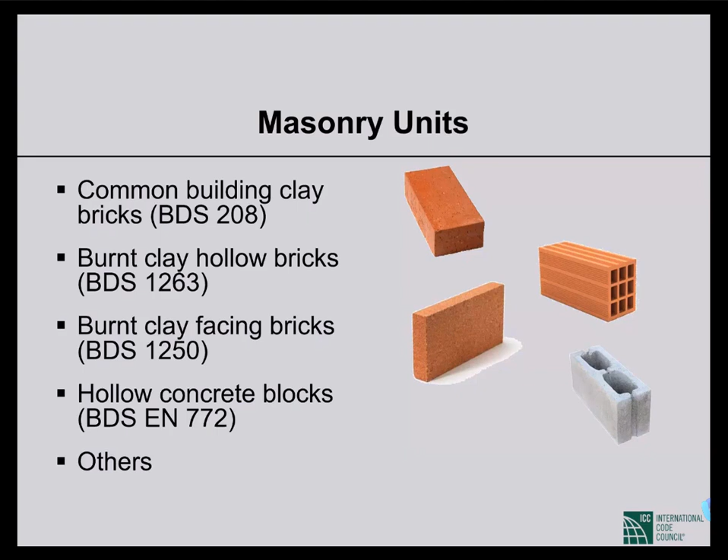Now, that was about masonry unit. And now let's talk about mortar. I think we should keep in mind that mortar is the most important part of masonry, because the strength of the masonry work mostly depends on the strength of the mortar, because mortar is the weakest, or the joints are the weakest part of masonry. I think you all know about this, and that's why we have to be very careful about mortar strength.

Now, depending on the cement to sand ratio, mortars are classified in different grades. So there are 6 standard grades. M1 is the highest grade, or the strongest one, where cement sand ratio is 1:3. And we have M2, M3, M4, M5, M6. M6 is the leanest or weakest grade, where cement sand ratio is 1:8.

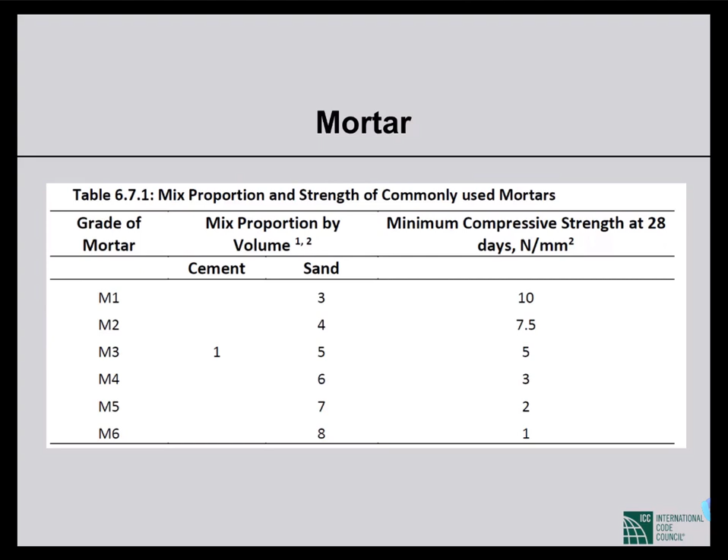Now you can understand the ratio by adding just 2 with the grade. Like for M4, the cement sand ratio will be 4 plus 2, 1:6. And the minimum prescribed compressive strength is mentioned here. We'll see how we can make sure that the compressive strength satisfies these values by doing some tests. We'll talk about that test. So these are the mortar grades.

Now grout to fill the cells of hollow blocks. There can be 2 types of grouts: one is fine grout and another is coarse grout. In fine grout, we don't use any coarse aggregate. In coarse grout, we use fine aggregate and coarse aggregate too.

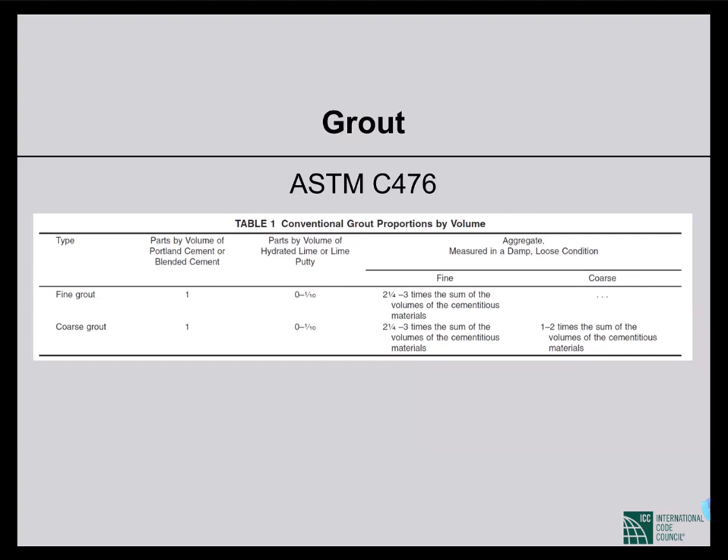So the cement to sand ratio for fine grout is usually 1:3 or like that. And for coarse grout it's 1:5, where 2 parts of the 5 parts is coarse and 3 parts among 5 is fine. So we have to classify this because it's important when we decide about the clear spacing between bar, rod, and masonry unit. For fine grout, we can spare less spacing, and for coarse grout, we have to leave greater spacing. So for that, we need to know what type of grout we are going to use.

Reinforcement: any ordinary reinforcement can be used, like deformed and plain billet steel bars, which is the most common type we have, which is ASTM A615. The ductile type is ASTM A706, which is low alloy steel deformed bars, like the ductility class D steel bars, for example, 500 DWR or 500 DR.

Those are ASTM A706 type rebars. We can use ASTM A706 or normal type ASTM A615. Wires are also available, 6 millimeter or less diameter rebars, available in our country, and epoxy coated rebar can also be used. So all types of rebars can be used as reinforcement.

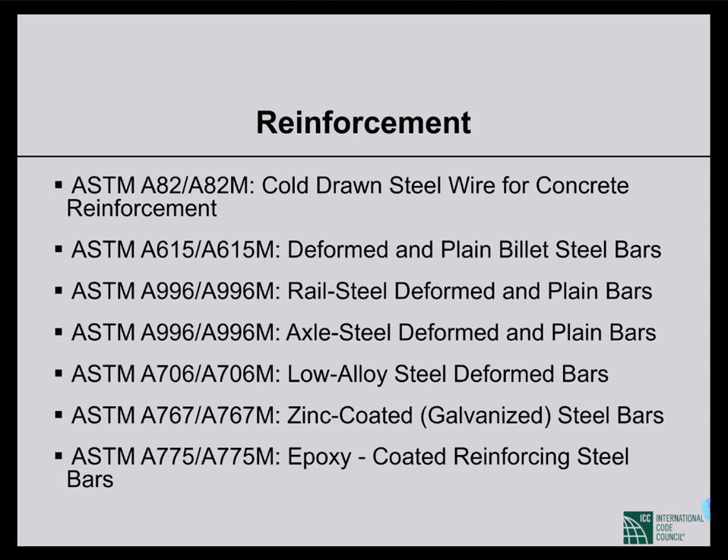Now, metal ties and anchors are used for anchoring the brickwork with foundation or with any other stiff walls like concrete walls, concrete column, steel column, etc. Ties are also used in multi-leaf or multi-wythe cavity walls to connect two wythes or leaves of brickwork of the wall.

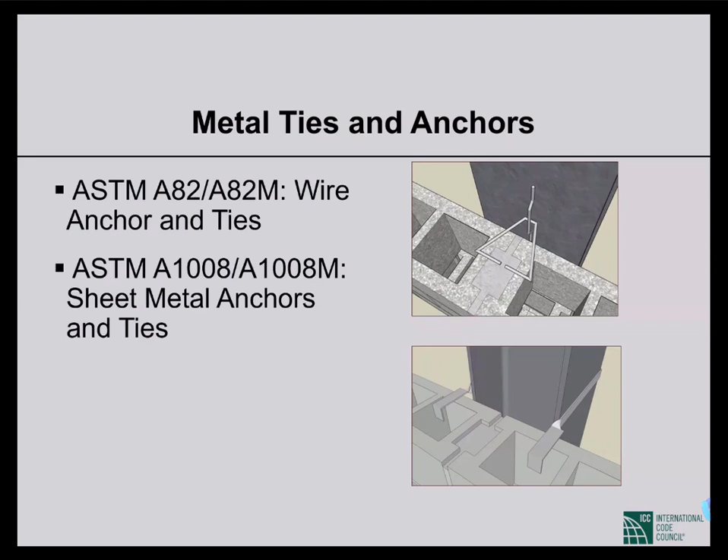Now let's talk about basic design requirements. As I said, the basic design philosophy is working stress design. So for masonry, the code's recommended design method is working stress design method. The stress-strain relationship considered is linear, and second-order effects are not considered. The eccentricity is considered to be very small, and there are provisions which try to make sure there is very small eccentricity of loading on the wall.

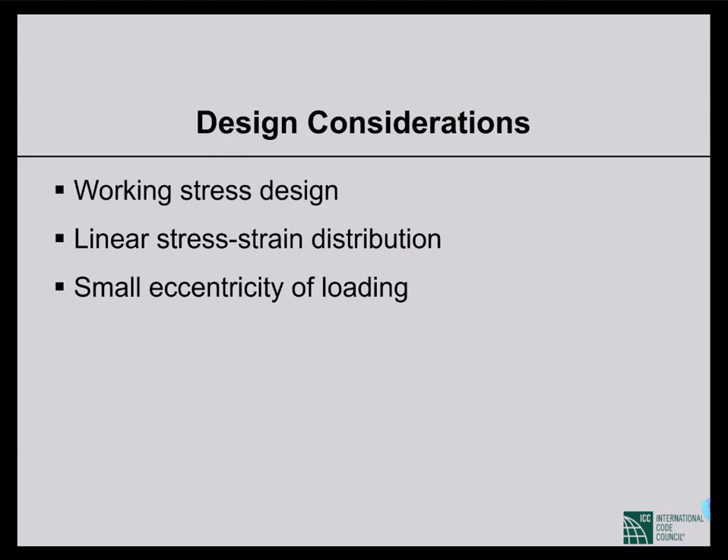Now there are some geometric parameters we have to understand before talking about the design formula. For example, height, effective height. For different support conditions, the effective height of a wall or column will be different. Remember, there can be masonry columns too. Masonry does not have to be only walls, there may be columns. The distinction between wall and column is just the length to thickness or width to thickness.

Width and length is the same thing in this context. Length to thickness ratio - if the width or length of a masonry work is less than 3 times the thickness, then that is a column. If more than that, it's a wall. Depending on the support condition, the effective height will be different. If the wall is continuously supported at the bottom and at the top, then the effective height is the same as the wall height.

But for example, in the figure on the right side, there is a steel beam on top of the column, and there may be a very light roof like a truss, which is not giving continuous support to the wall in the direction out of the plane of the wall. Sorry - it is giving support in the outward direction, out of the plane direction, but not giving any support in the in-plane direction. So in-plane, along the plane of the wall, the effective height is twice the height of the wall. And out of the plane, since there is support, the effective height equals the height of the wall.

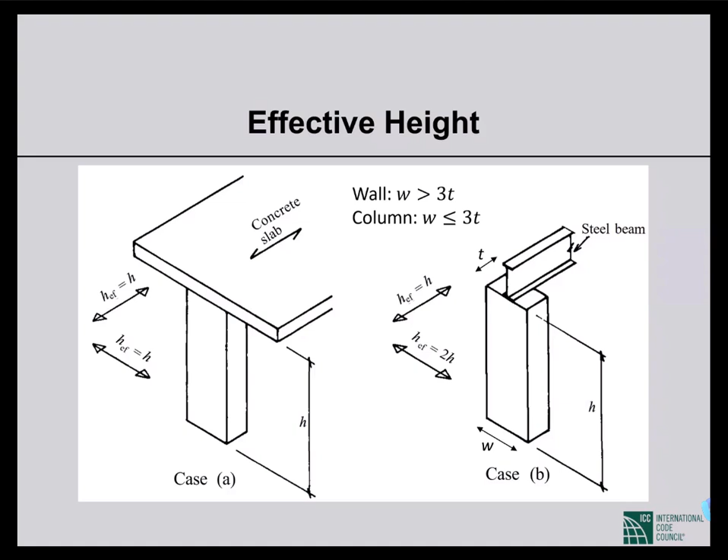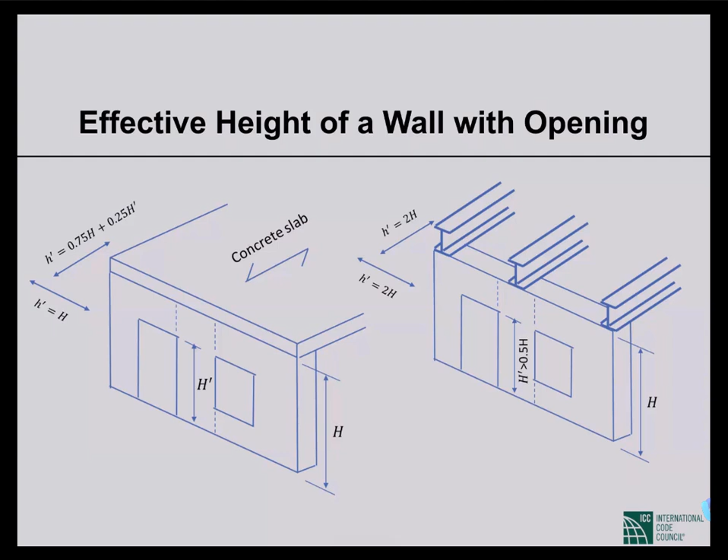That was effective height. Now we also need the definition of effective length. There may be 5 different conditions. On the top left, you can see that the wall is continuous and is supported by cross walls.

And openings are away from the cross wall by a length of 1/8 of the height of the wall. In that case, the effective length will be the shortest one, which will be 80% of the spacing, center to center, of the cross walls. So that will be the effective length, 80% of the length, this is the shortest one. Remember, the longer the length, the greater the slenderness ratio, so that's more conservative.

In the second case, on top right, we can have a cross wall on one end and continuous on the other side. In that case, the effective length will be 90% of the spacing between the cross walls.

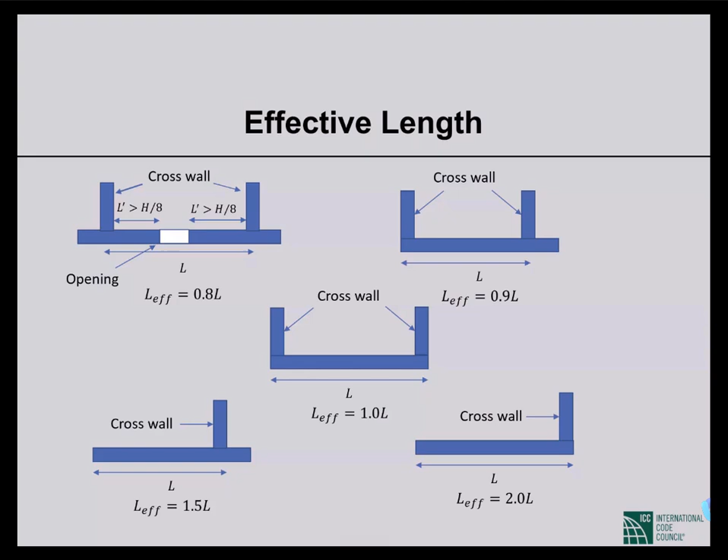So we have talked about effective height and effective length. Now we'll talk about effective thickness. Effective thickness is basically the nominal thickness of the wall.

But in case of a cavity wall, you can see the second case on top right. This is just a cavity wall where we have two leaves of wall, or two limbs. In different standards, it is termed differently. Even in our code, sometimes it's called wythe, sometimes limb, and in other standards it's called leaf. So we have two limbs or wythes of brickwork and a cavity in between. This is called a cavity wall.

So in case of a cavity wall, the effective thickness is the summation of the thickness of the two limbs, T1 plus T2. In many cases, we can have piers or pilasters.

A pilaster or pier is a kind of stiffener where, in certain locations, we thicken the wall to give lateral support. When this type of pilaster or pier is used, the pier thickness is termed TP, which is the summation of the thickened part. The total thickness of the thickened part is called TP, pier thickness.

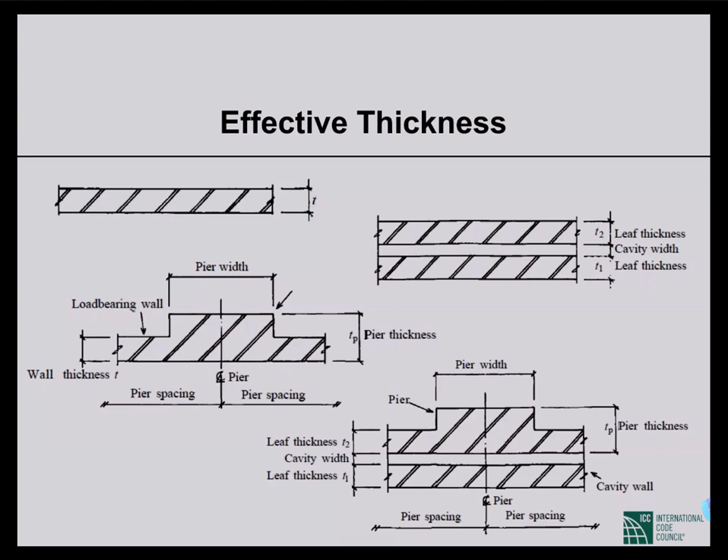Effective thickness is the thickness of the wall multiplied by a factor K. The K depends on two things: one is the LP by WP ratio, where LP is the center to center distance of pilaster spacing and WP is the pilaster width. The other is TP by TW, where TP is the pier or pilaster thickened width and TW is the nominal thickness of the wall. Depending on these two ratios, we multiply the nominal thickness of the wall by the factor K, and that is the effective thickness.

So now we have the definition of slenderness ratio. For walls, the slenderness ratio is defined as the lesser of the effective height to effective thickness ratio, or the effective length to effective thickness ratio. We have discussed effective height, effective length, and effective thickness, so now we can calculate these ratios, and the lesser of the two will be the slenderness ratio of the wall. And there is a provision that...

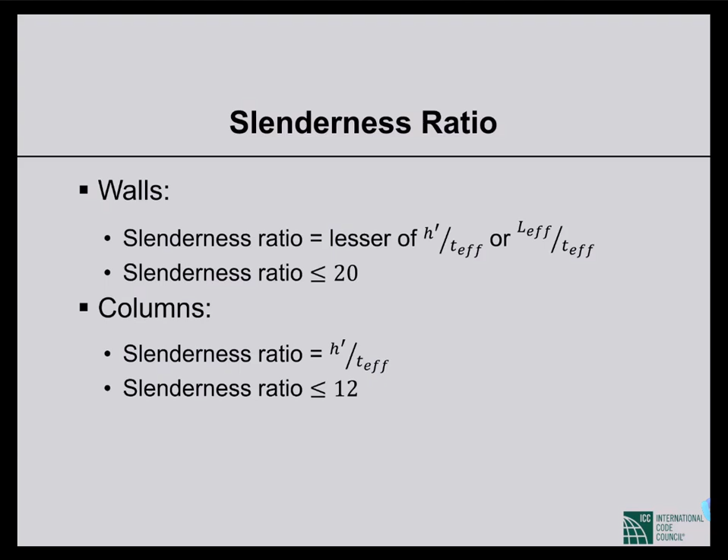We need another piece of information related to loads. Loads will follow Part 6 Chapter 2 - dead load, live load, wind load, earthquake load - as defined there. These were discussed previously in other sessions, so we'll just follow them, and we'll use the load combinations of working stress design, or allowable strength design load combinations.

For calculation of stresses, we need the loaded length. For example, if there are beams on a wall and the load is coming to the wall through the beams, what should be considered as the loaded length for stress calculation?

The loaded length will be the center to center spacing of the beams, but this cannot be more than the width of loading shown in the picture - that is the flange width of the beam or the bearing width of the beam, plus 4 times the thickness of the wall. So it's limited to this value. We can divide the load by the loaded length and the thickness of the wall to get the stress in a simple way.

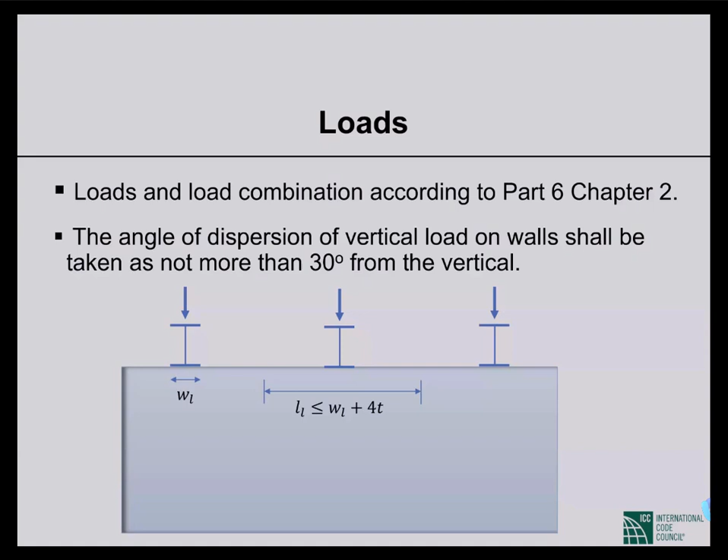Minimum design dimensions - this is very important. For load-bearing walls, the effective thickness of the wall must be greater than 250 millimeters, that is 10 inches. 5-inch walls cannot be load-bearing walls. If we want to design load-bearing walls, the minimum thickness has to be 250 millimeters or 10 inches.

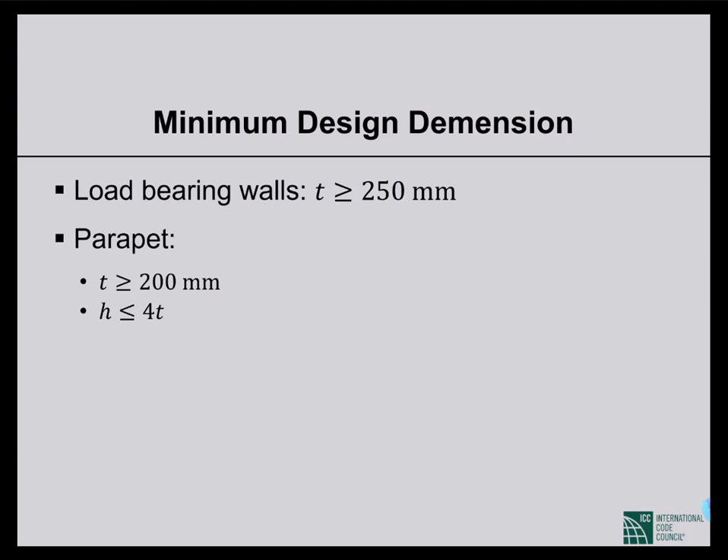For parapets, the minimum thickness requirement is less, that is 200 millimeters. And for parapets, the height must be less than 4 times the thickness of the parapet. In other words, if we want a higher parapet, we have to increase the thickness. So those were the basic design requirements.

Now, what are the formulas for allowable stresses? Remember, we follow working stress design, so we'll define allowable stresses. But first we need to know the strength of the brick unit. Like the cylinder test, by which we understand the strength of concrete, FC prime - here we have FM prime, the 28 days strength of masonry unit, just like the cylinder test. This is mentioned in ASTM E447, the prism test.

We can prepare a masonry unit sample by placing 5 bricks with bed joints, and this will make a prism. In some cases we can make it using 3 bricks or similar. The slenderness ratio is corrected in calculation as given in ASTM E447. Usually 5 bricks are placed with bed joints. Using a UTM or any compression testing machine, we apply compression and determine the strength, which is FM prime, the 28 days strength of masonry unit.

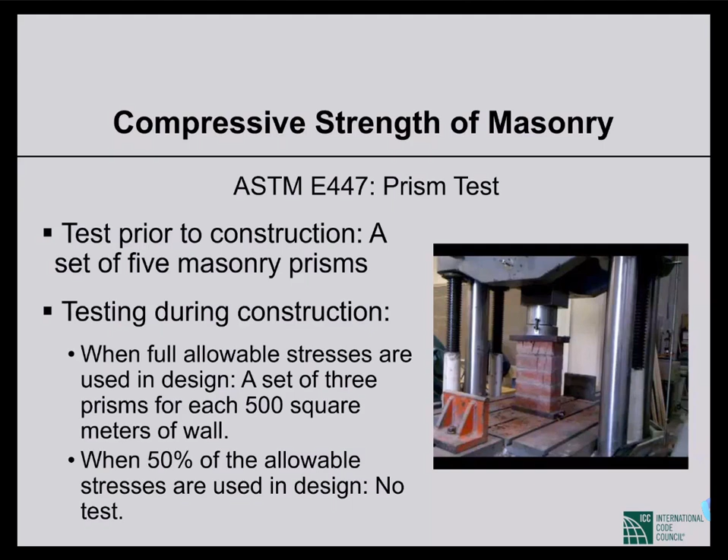So now what are the allowable stresses? The allowable stresses for axial compression, flexural compression, shear, etc., we'll see. But another important clause in the code is that if we don't take help of special inspection, we have to divide all these allowable stresses by 2 - that is, we can take only 50% of these as allowable. So if we have proper inspection at site, these formulas will give us the allowable stresses.

Now, for axial compressive stress for unreinforced masonry, all these cases depend very much on the slenderness ratio - this H prime by T ratio is the slenderness ratio, effective height by effective thickness. Normally FM prime is the 28 day masonry strength, and for URM we divide this by a factor of 5, so the factor of safety is like 5.

We are subtracting this value depending on the slenderness ratio, and it depends cubically. So if our slenderness ratio is high, then the allowable stress is reduced cubically. So that is very important.

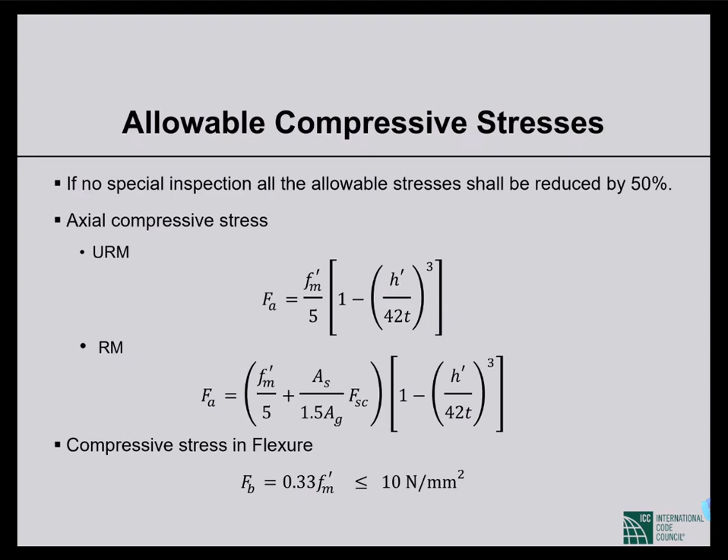That is the specified strength of M1 grade mortar, the strongest grade of mortar, with specified strength of 10 megapascal. Since the masonry joint is the most critical part of masonry construction, the strength is governed by the joint strength, and this cannot go beyond the strongest masonry grade strength. That's why there is this limit of 10 megapascal.

Now, allowable tensile stress. We talked about compressive stress; now let's talk about tensile stress. Tensile stress tries to pull the masonry units apart, the bricks apart. The bricks can be taken apart from the bed joint or from the head joint. Depending on whether the tension is normal to bed joint or normal to head joint, we have different allowable stresses, and we have different allowable stresses for solid units and for hollow units.

For M3 and M4 type mortar - remember there were 6 grades, M1 to M6. For M1 and M2, the cement to sand ratio is 1:3 and 1:4, and for those types these are the allowable stresses. But for M3 and M4, with cement to sand ratio 1:5 or 1:6, we have to reduce these values by 25%. This is important. Actually, below M4, grades M5 and M6 are seldom used for structural load-bearing masonry construction.

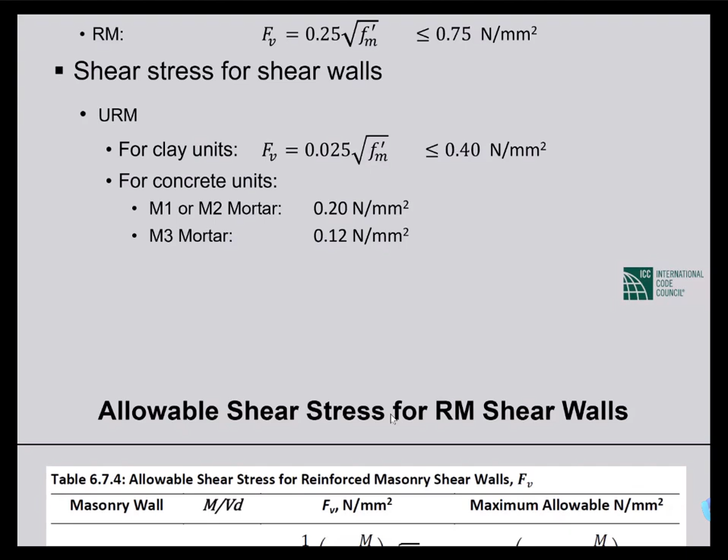For reinforced masonry, it will depend on the moment - in-plane moment divided by shear force, divided by effective depth. Effective depth is calculated from one end to the reinforcement at the other end, the same way we calculate effective depth for reinforced concrete.

So M by VD. Now, if M by VD is less, we have a different formula. If the contribution of the moment is large, then we have some fixed values depending on Fm prime as allowable shear stresses.

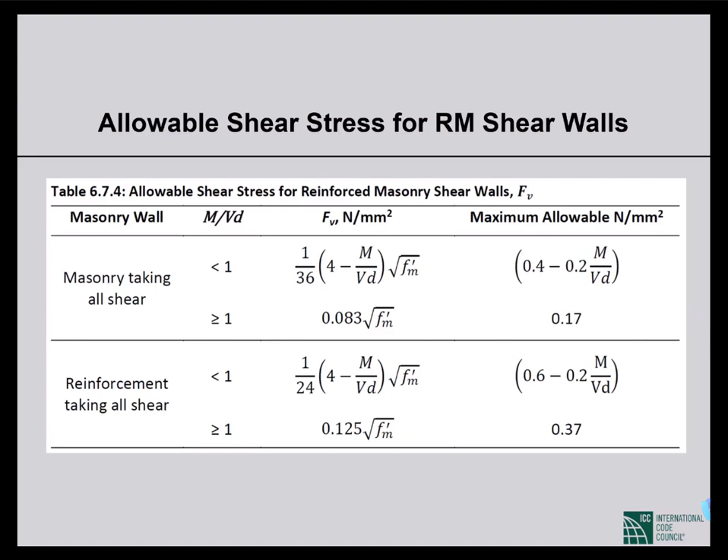For reinforced masonry, we can design in two ways. For tensile stresses, we always depend on reinforcement. But for shear stress, we can depend on masonry or we can depend on reinforcement. So depending on our assumption, the allowable stresses are different.

Now, those were the allowable stresses in masonry. Now, for allowable stresses in reinforcement - for tensile stress, compressive stress, and bond stress - these are the values. You see, we are quite conservative. This is working stress design. So naturally, the allowable stress is 50% of Fy for tensile stress, but the highest limit, which is quite conservative, is 165 megapascal.

So 50% of 60 grade steel is how much? 210 megapascal, if we consider 420 megapascal as 60 grade. So in that case, 210 should be the limit for 60 grade steel. But here we are quite conservative - we don't allow the allowable tensile stress to be more than 165 megapascal, which is like 40% of Fy for 60 grade steel.

For reinforced masonry construction, we are quite conservative because we cannot depend on the bonding between the reinforcement and grout as reliably as we can depend on the bonding between reinforcement and concrete. The bonding will not be as reliable. That's why we're quite conservative even for allowable stresses in reinforcement. The other values you can see.

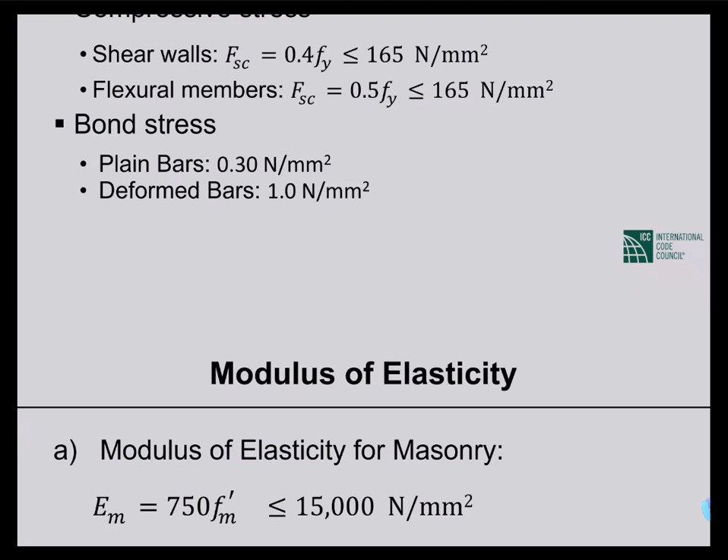Now, for modeling purposes, modulus of elasticity is important. From the prism test, we can find Fm prime, and depending on Fm prime, we can calculate the modulus of elasticity, just like for concrete.

Modulus of elasticity depends on Fc prime for concrete, and here for masonry it depends on Fm prime, but this is directly proportional to Fm prime. In case of concrete, it is proportional to the root over Fc prime. Here it is directly proportional to Fm prime.

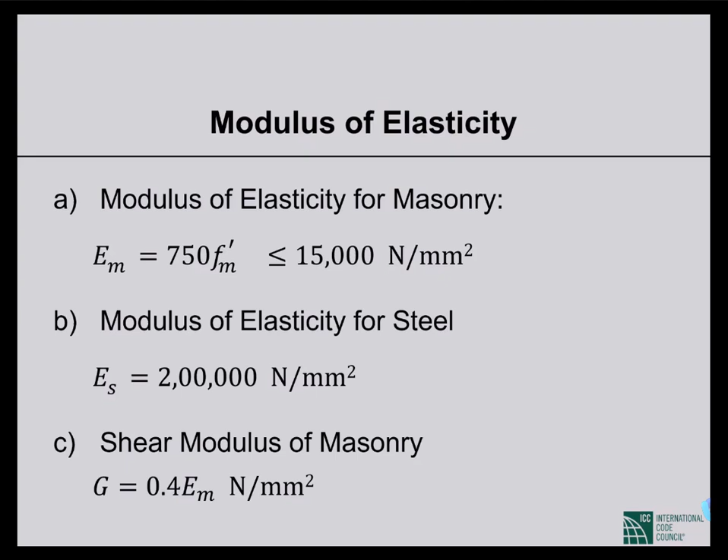So we have all the basic geometric parameters like effective height, effective length, effective thickness. Based on these geometric parameters, we can define slenderness ratio, and based on slenderness ratio, we can define allowable stresses. Then for design of unreinforced or reinforced masonry, we have to check with the applied stresses.

The actually applied stresses use quite common formulas. For unreinforced masonry, we consider it as a homogeneous material, and based on that assumption, we just calculate the basic stresses. So for axial stresses, it's just force divided by area.

For flexure, it's MC over I, and for shear, force divided by effective area. You have to remember the areas as effective areas, where we'll use effective length and effective thickness to calculate effective area. So that's the only difference. This is very easy.

Then for reinforced masonry, things are the same as what we do for reinforced concrete. Here the assumptions are: masonry does not carry any tensile stress, so all tensile stresses will be carried by reinforcement. And the second assumption is reinforcement is completely bonded with the masonry through grout.

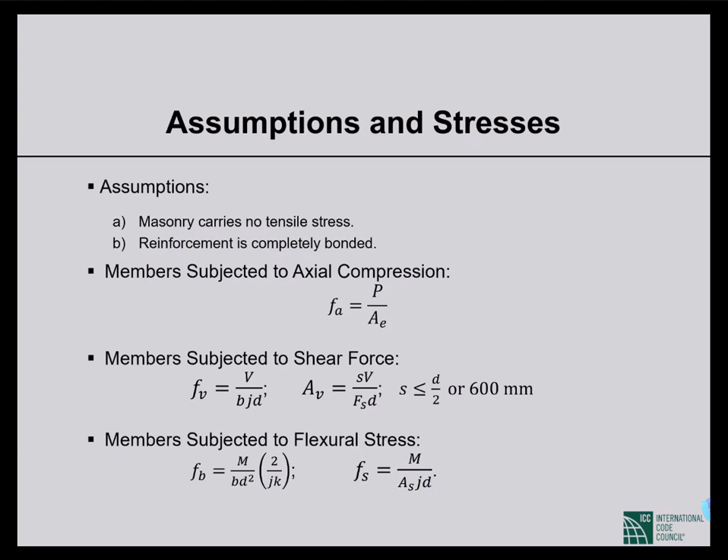Some requirements for reinforcement: the first is maximum reinforcement size. We can go for quite a large diameter rebar, 35 millimeters is the maximum reinforcement size we can use. The maximum amount of reinforcement in a cell is 6% of the cell area without splice. If we use splice for lapping purposes, we can double this percentage to 12%. Now, spacing of longitudinal reinforcement is similar to reinforced concrete: spacing between two bars will be 25 millimeters or bar diameter.

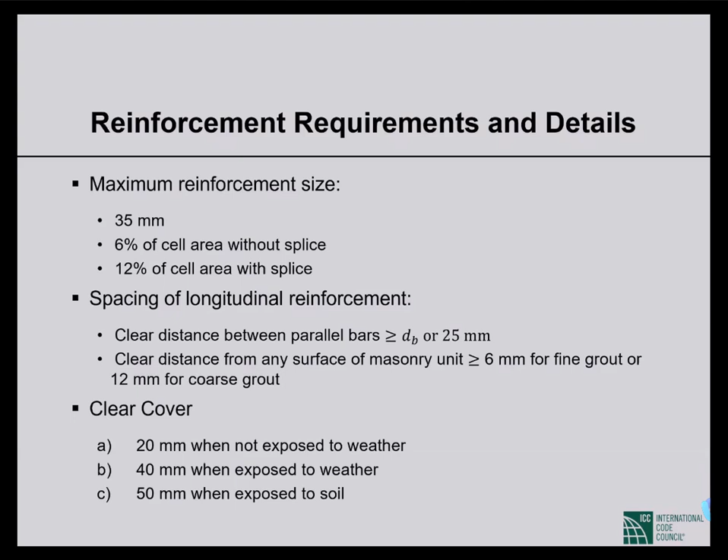Now the stability requirements, so that is very important. This is very important. In case of masonry, since in our analysis we are not considering second order effects, we have to make sure that second order effects do not come, or even if they do come, they are not significant.

So the basic requirement is that the height to width ratio of a masonry building cannot exceed 2. Height to width ratio is specified, and we have to stiffen the walls by cross walls or piers or pilasters. We have to stiffen the walls at regular spacing.

Now, that was all about working stress design of unreinforced masonry wall or reinforced masonry wall. But there is also a strength design method, but that is particularly for slender walls and shear walls.

Slender walls are defined when the axial load is much low compared to its strength. So if the load from wall and load from floor — PW is the load from the wall, so self weight, and PF is the load from the floor, that is live load plus self weight, dead loads of the floor and beams etc. — PW plus PF divided by the gross cross section is less than 4% of FM prime, then we can go for slender wall design, and FM prime cannot be more than 40 megapascal.

Now, in this case, we can go for slender wall. Again, even if we go for slender wall, the wall thickness cannot be less than 150 millimeters. So minimum wall thickness for non-slender type of construction is 250 millimeters, but minimum wall thickness for slender type of construction is 150 millimeters.

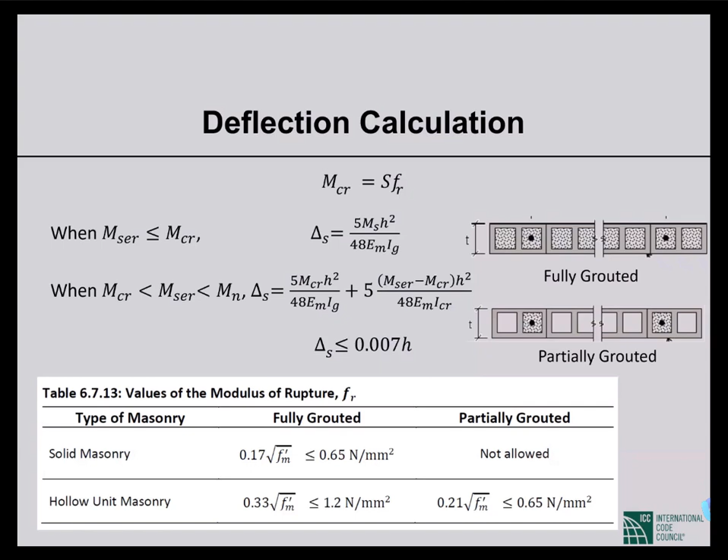So using this formula, we can calculate delta, and with that delta, we have to multiply the axial force. Then we'll get the applied moment, ultimate moment on the section. So we are considering second order effect of slender walls in this indirect way.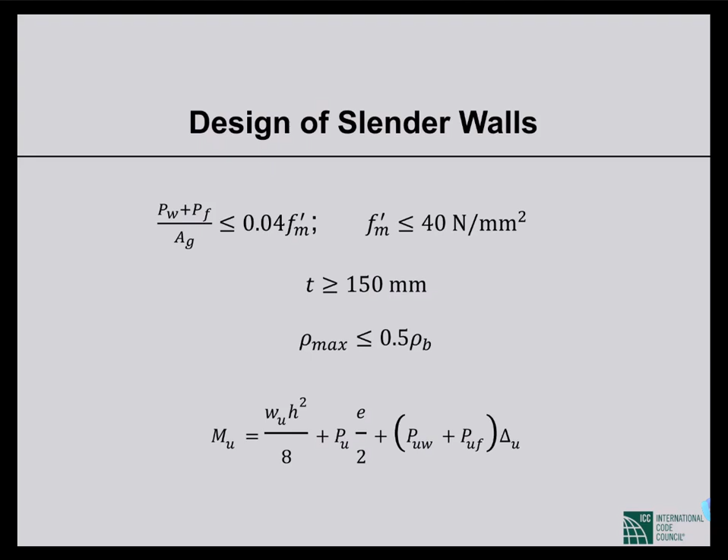And then shear walls. For design of shear walls, the phi values, strength reduction factors. Since we are adopting the strength design method, the strength reduction factors are specified for axial load or axial load with flexure. The phi value is quite low, 0.65, but we can take higher values if the axial load is less. For Fy less than 410 megapascal, that is not for 60 grade, 60 grade or higher grade steel. For higher grade steel, we have to go for phi equals 0.65.

But for lower grade steel, and if the arrangement of reinforcement is symmetrical, then we can increase the value of phi if the axial load is less, actually. So if the axial load is less than 25% of axial load, if we consider balanced reinforcement, or 10% of the total capacity of Fm prime into effective area, if it is less than 10%, then we can increase the value of phi. For shear, it is even less, 0.6.

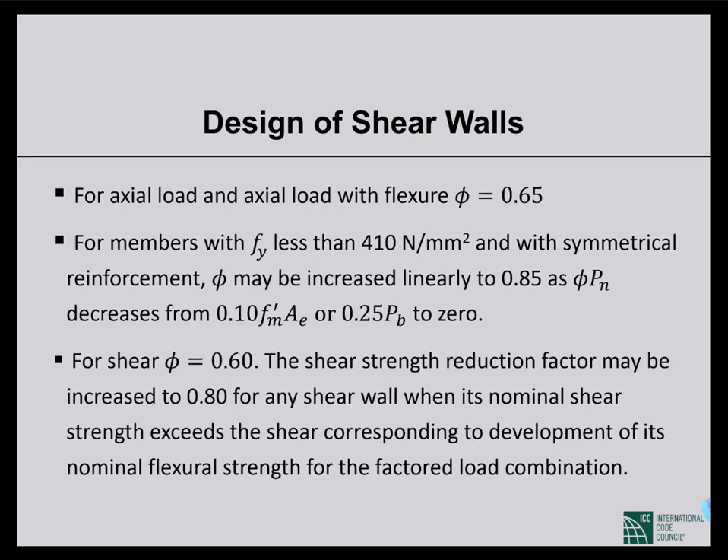So now the nominal strength Fm prime, we get this value from Prism test, but Fm prime cannot be less than 7 megapascal or cannot be more than 20 megapascal. Axial strength is the same formula as we use for RC columns, similar formula, so that is for axial strength.

Shear capacity will depend again upon M by VD ratio, and the shear capacity is mentioned here in megapascal. So shear capacity is the Vn. We have to multiply Vn with phi, and these values are given as Vn divided by A root over Fm prime. So basically Vn is equal to 72 into A into root over Fm prime, and we have to multiply this with phi, then we'll get the shear strength. So for shear stress, the in-plane stresses, the capacity for in-plane stresses, we can calculate them with these formula.

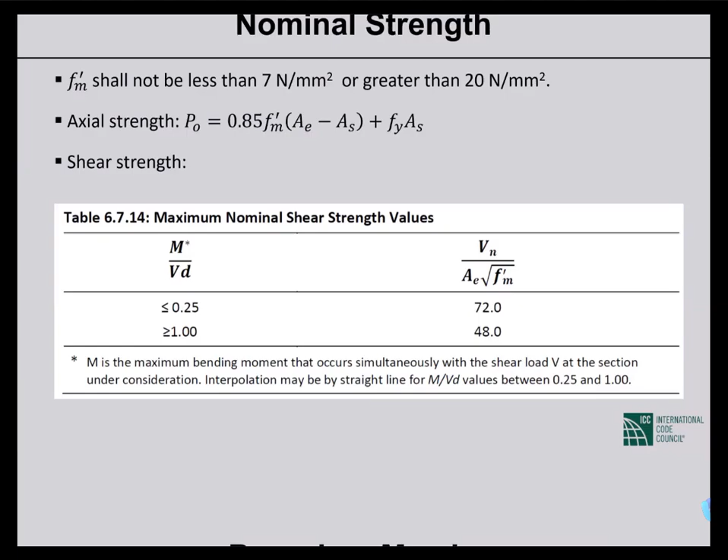In case of shear walls, we may have to use boundary members, similar to reinforced concrete shear walls. In boundary members, we have to use ties with vertical reinforcement. Now, when we have to use boundary members, if the failure mode is flexure, and the maximum extreme fiber stress, that is flexural fiber stress, is 0.2 Fm prime, then we have to use boundary members to take care of the extreme stresses on two ends of the shear wall.

When the failure mode is flexure, boundary members shall be provided to confine all vertical reinforcement whose corresponding masonry compressive stress exceeds 0.4 FM prime. The minimum length of the boundary member shall be 3 times the thickness of the wall, meaning the dimension along the length of the wall will be 3 times the wall thickness. And the capacity of the boundary element has to be 0.4 FM prime.

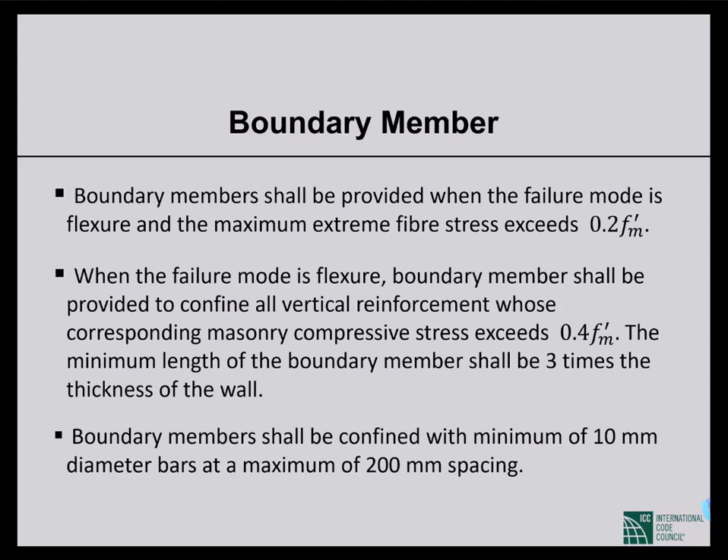So those were some important points regarding design of shear walls and design of slender walls using strength design method. We have talked about working strength design method for unreinforced masonry construction and reinforced masonry construction, and we have talked about the strength design method for slender walls and shear walls. There are some more details in the code, so please look up the code for those details. We have just briefly mentioned some important points regarding capacity and stresses that will come out of those structures.

Now, a very important part is earthquake resistant design. For different seismic zones, we have different provisions for masonry construction, and those are given in detail in this section of the code. This section is for masonry construction in seismic zones 2, 3, and 4. For seismic zone 1, you don't have to follow these specific earthquake resistant design provisions.

Number one, FM prime cannot be less than 12 megapascal. Remember, for shear wall, we mentioned that FM prime cannot be less than 7 megapascal, but for earthquake resistant design, FM prime cannot be less than 12 megapascal. This is somewhat similar to earthquake resistant design of concrete, where the concrete strength cannot be less than 3000 psi, or 21 megapascal. So for masonry, it's 12 megapascal.

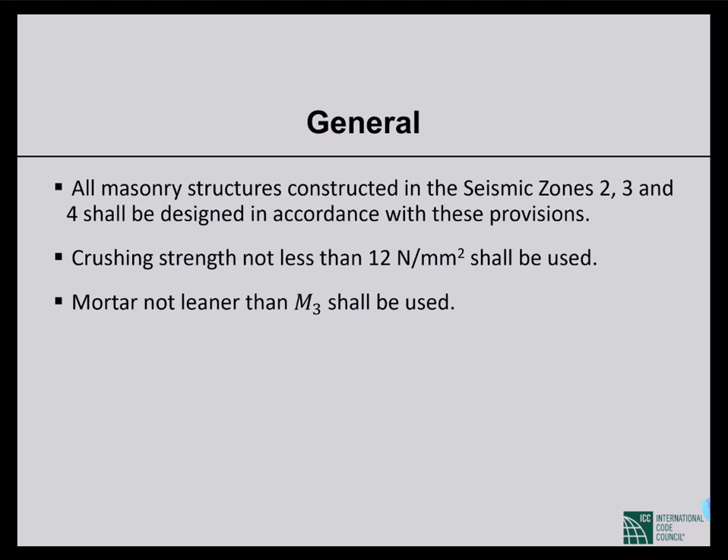And mortar must be of M3 grade or higher grade - M1, M2, M3. That is, cement sand ratio should be 1:3, 1:4, or 1:5. No leaner mortar can be used - M4, M5, M6 cannot be used for earthquake resistant design. Those were for material.

Now provisions for seismic zones 2 and 3. We have different sets of provisions for seismic zones 2 and 3, and for seismic zone 4. For seismic zones 2 and 3, vertical reinforcement of at least 12 millimeter diameter shall be provided continuously from support to support at each corner, at each side of each opening, at the ends of walls, and at a maximum spacing of 1.2 meters horizontally throughout the wall. So a lot of details - number one, the minimum bar diameter for vertical reinforcement will be 12 millimeters.

Number two, where to provide vertical reinforcement - this is actually the earthquake resistant design for unreinforced masonry. Even for unreinforced masonry, we have to provide at least these reinforcements. For reinforced masonry, we normally use reinforcement and calculate what reinforcement will be needed, but these provisions are for unreinforced masonry, and we have to provide at least this reinforcement at specific locations.

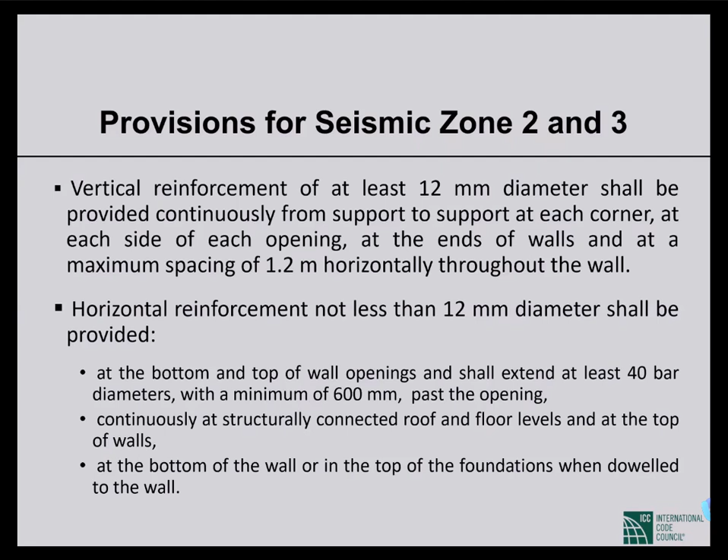For seismic zone 4, all those requirements, the provisions mentioned for seismic zones 2 and 3, will be applicable, plus additional requirements. The sum of the areas of horizontal and vertical reinforcement shall be at least 0.002 times the gross cross-sectional area of the wall.

So 0.2% of AG, this amount of reinforcement has to be provided both horizontally and vertically. Say 50% of this has to be provided as vertical reinforcement, and 50% has to be provided as horizontal reinforcement.

So for the cross section, you have to take the cross section of a wall. For horizontal reinforcement, you take a vertical cross section. For vertical reinforcement, you take a horizontal cross section.

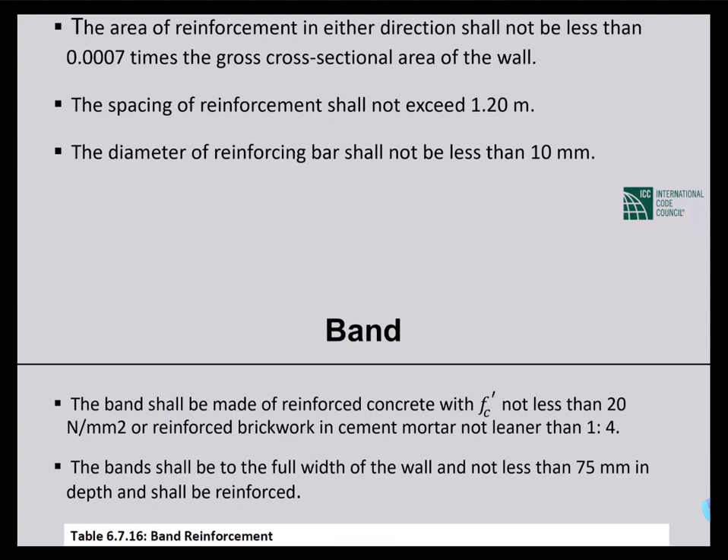We are supposed to provide vertical reinforcement at the corners and at the sides of the openings. So we calculate all those reinforcements, and if that is less, we calculate the vertical reinforcement provided as per the provisions already mentioned, along with horizontal reinforcement. If the summation of those reinforcements is less than 0.002 times the gross cross-sectional area of the wall, we have to provide more reinforcement.

The area of reinforcement in either direction shall not be less than 0.0007 times the gross cross-sectional area of the wall, so there is a minimum in each direction. The spacing of reinforcement shall not exceed 1.2 meters, both for horizontal and vertical, and the diameter of reinforcing bar shall not be less than 10 millimeters.

So even in case of ties for boundary elements, the diameter of rebar will be 10 millimeters or more. But for horizontal and vertical reinforcement, it has to be 12 millimeters or more.

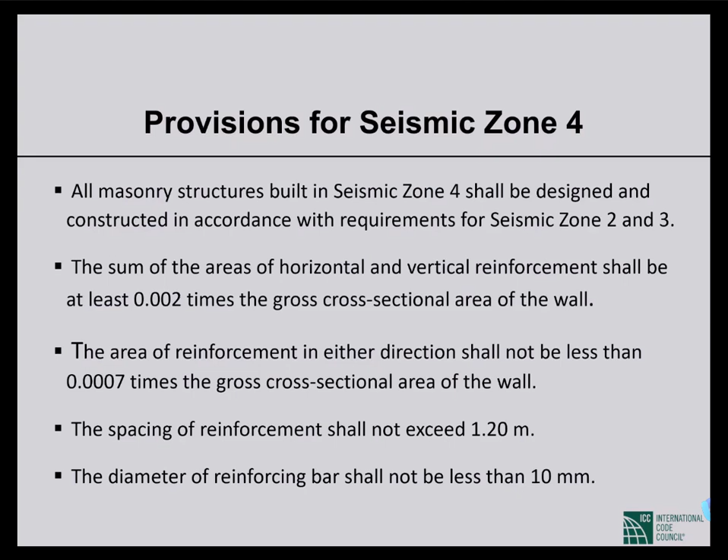And band - we have to place some concrete sections at certain locations. These are called bands, some reinforced concrete sections. The band shall be made of reinforced concrete with FC prime not less than 20 megapascal, or reinforced brickwork in cement mortar not leaner than 1:4, that is M2. The bands shall be to the full width of the wall and not less than 75 millimeters in depth, at least 3 inches, and shall be reinforced.

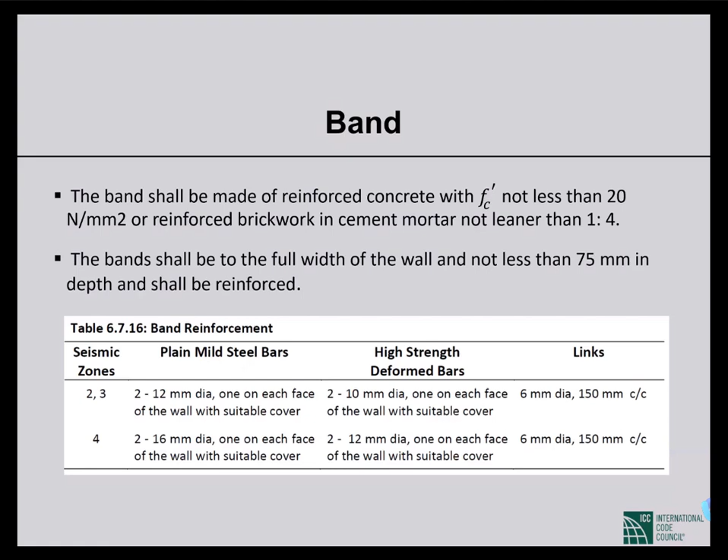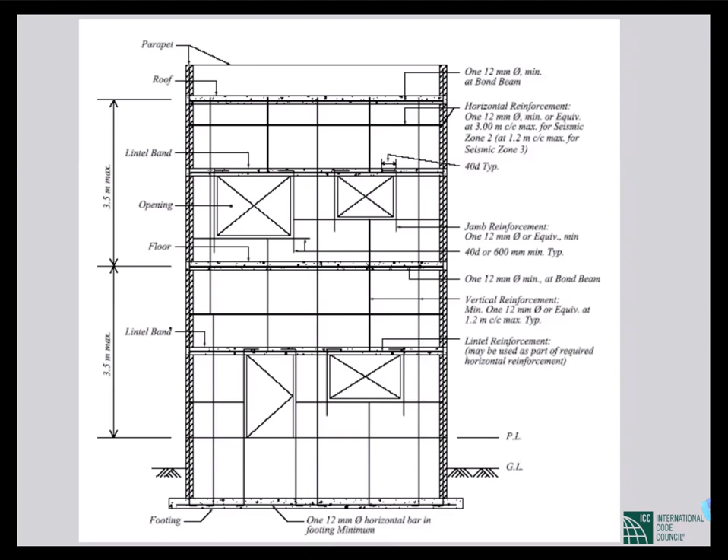So that was earthquake resistant design of masonry. Remember again, for seismic zones 2, 3, and 4, we cannot make a purely unreinforced masonry - that is the traditional practice in our country, where we don't use any reinforcement in masonry. But even if we want to build an unreinforced masonry building, at least these reinforcements have to be provided. If we do not go for reinforced masonry design, even then we have to use those reinforcements.

So now you understand that traditional unreinforced masonry is not allowed in seismic zones 2, 3, and 4. You have to remember that. Now, since traditional unreinforced masonry is not allowed, for those buildings already built, how do we strengthen them?

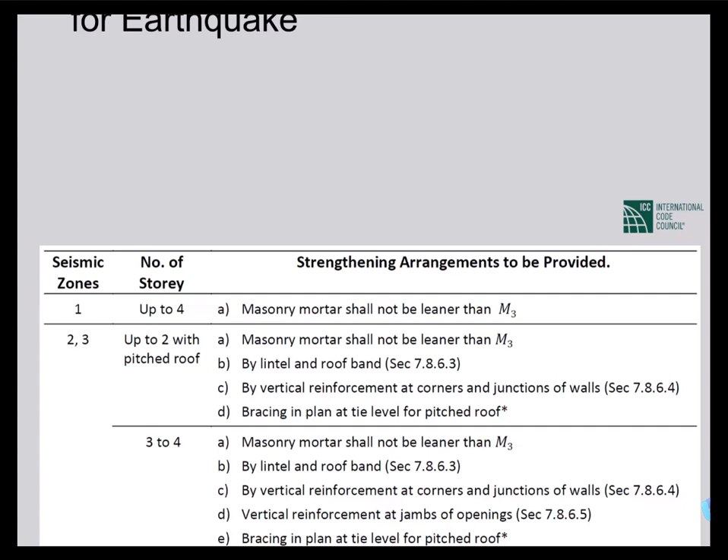There is a table in the BNBC 2020 with some guidelines on what has to be used, what types of materials we can use for strengthening. It will depend on the seismic zone - if the building is in seismic zone 1, 2, 3, or 4 - and depending on the height of the building, the strengthening arrangements are listed in this table.

For example, if we talk about seismic zones 2 and 3, up to 2-storied height buildings, we can go for masonry mortar not leaner than M3. This is true for all the cases. We have to use lintel and roof bands - here you see where we have to use bands, it is mentioned.

For seismic zone 1, we don't have to use any band, that is reinforced concrete sections. But for strengthening purposes, for seismic zones 2, 3, and 4, we have to use lintel and roof bands. Vertical reinforcement has to be used at every corner and junction of walls, and bracing in plan at tie level for pitched roofs - for the pitched roof at the tie level, we have to use bracing.

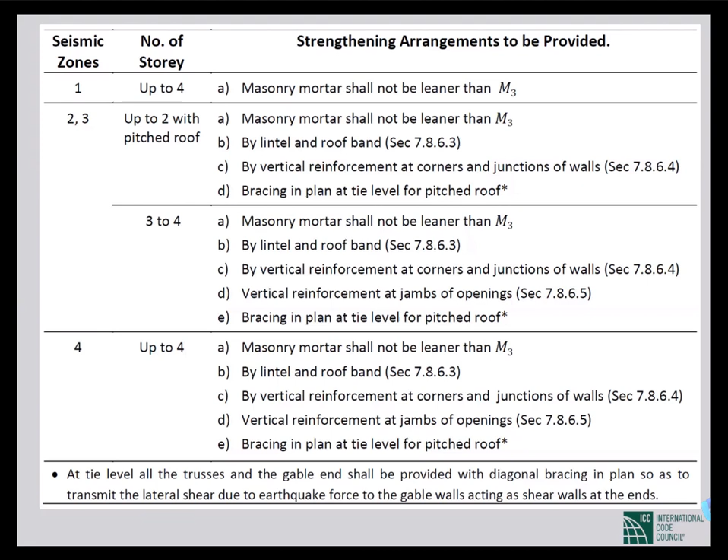Similarly, for higher buildings, we have additional requirements. Vertical reinforcement at jambs of openings have to be provided, etc. The relevant sections are mentioned in this table, so for strengthening purposes of unreinforced masonry construction in different zones and heights, we can consult this table and design accordingly.

So those were different specific guidelines for unreinforced masonry, reinforced masonry, slender walls, shear walls, and earthquake resistant design. Then we talked a little bit about strengthening of masonry construction. Now I'll introduce a new type of masonry construction. It is called confined masonry.

This is actually the new addition to BNBC 2020. All other provisions were actually there in BNBC 2006, except that the mention of zones were different in the previous code, and in this version we have 4 zones. Apart from that, all other provisions are identical to the previous version. This confined masonry was not there in BNBC 2006. In BNBC 2020, this concept is introduced.

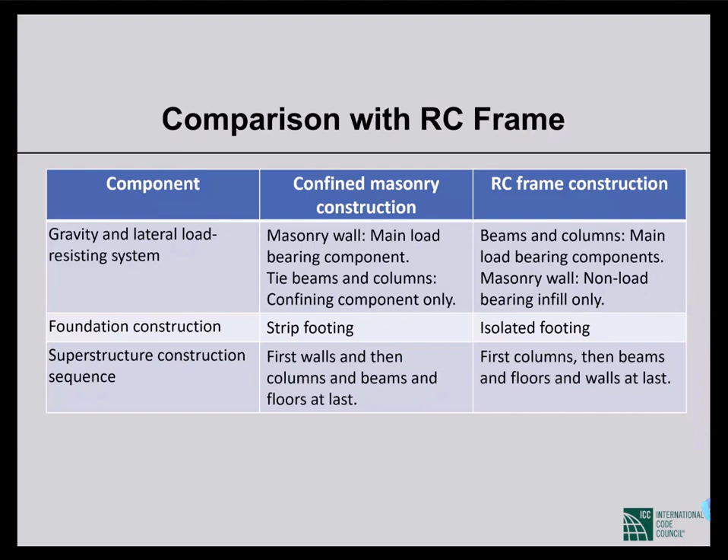Now there are some architectural guidelines. First, building length to width ratio should not exceed 4. So not only width to height ratio, but here width to length ratio is important - it should not exceed 4. The walls should be continuous up, so that there shouldn't be any offsets.

The walls should be on top of each other like load-bearing walls. We cannot have walls in any place on the slab like we do for RC frame structures, where we can place walls in between any place on the slab. We cannot do that in this type of construction. The walls have to be on top of each other, continuously up.

Openings should be placed in the same position. This is also very restrictive from an architectural point of view, that the openings of the first floor should be exactly at the same position as the openings of the ground floor, or the second and third floor. In all floors, the openings should be at the same position.

At least two fully confined walls should be present in each direction. In each direction there has to be redundancy, so that we cannot depend on only one confined wall. There has to be at least two fully confined walls in each direction.

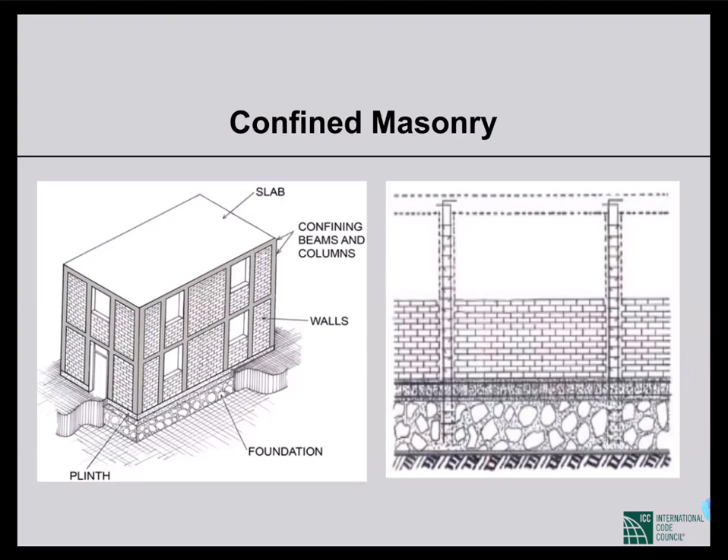And about the horizontal element at the floor level, at every floor level we have to have a confining beam or tie beam, at a maximum spacing of 4 meters. So these are the rules. We can build something like unreinforced masonry, but we have to have these confining elements, and that will make it confined masonry.

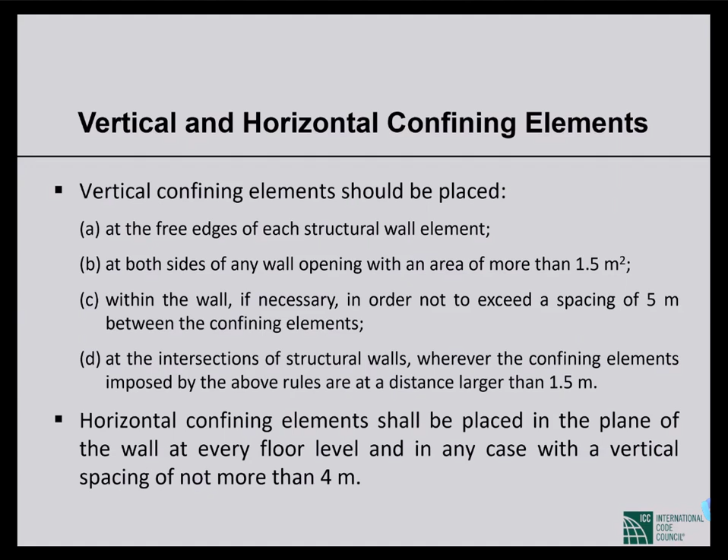So there are some more details for confined masonry construction. Confining elements should have a cross-sectional area not less than 0.02 meters square. What should be the area and minimum dimension of the confining element? What percentage of reinforcement should be used? These details are there. Confining elements should have a cross-sectional area not less than 0.02 meters square, with a minimum dimension of 150 millimeters along the plane of the wall, 6 inches. You can understand this is much thinner than a regular column.

The longitudinal reinforcement may not have a cross-section area less than 300 millimeters square. Total area of reinforcement is given, not less than 1% of the cross-section area. This is somewhat similar to RC, that we have to have at least 1% of the cross-section area of reinforcement and not less than 300 millimeters square.

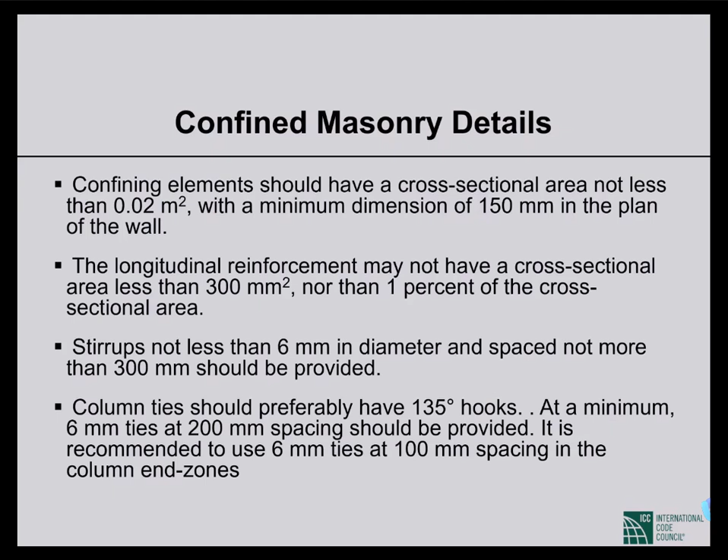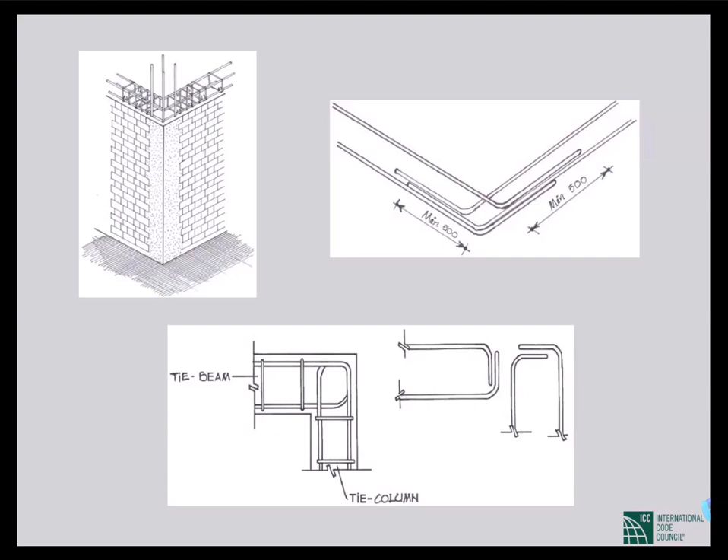So these are some details that are useful, like the joint between beams or tie beams, the joint between the tie beam and the tie column, and the interface between the wall and vertical confining element. So these details you have to remember.

I think I am at the end of my presentation. So today my presentation was short. It's about 9:30 and I have finished my presentation on masonry construction. So if I go back to the beginning and the topics, what we have covered...

We have talked about different components, which are actually masonry unit, mortar, grout, reinforcement, and ties or anchors. So those are the components.

Basic design requirements, we have discussed the effective height, effective length, effective thickness, slenderness ratio. Allowable stresses, since we adopt working stress design, we calculate allowable stresses for axial stress, for compressive stress from flexure, for flexural stress, tensile stress, for shear stress. We have all those formulas for allowable stresses.

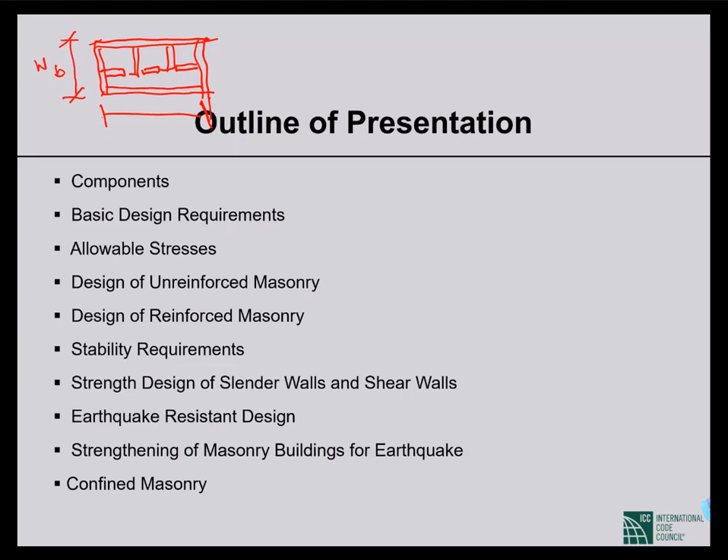Suppose this is the plan and we have some walls. These are the walls, and we have some rooms, some walls going like these, some walls here, some here, something like this. So if this is the width of the building plan floor, and if this is the length of the floor, I should write Lf. So total plan area of the plan is Wf times Lf, width multiplied by length of floor.

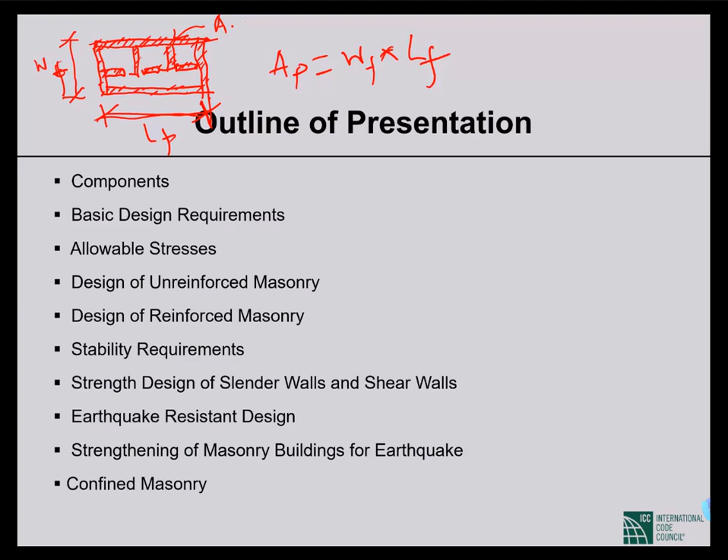The wall area is the hatched portion - only the hatched portion. We are looking at a floor plan, and these are the walls. The total summation of the wall area is say AW. Then wall density, call it TW, is area of wall divided by total plan area - this is wall density. We can segregate wall density in different directions - wall density along x direction, wall density in y direction. But in general, wall density is the total wall area in a floor plan divided by the total floor plan area. That is wall density.

I think the design of foundation of masonry structure is missing. Yes, there are some guidelines regarding that.

In the foundation chapter, you have all the necessary information regarding strip foundation. Masonry foundation will be strip foundation, and all the relevant information is given in Chapter 3, Part 6, Chapter 3.

What is the recommended compressive strength of concrete while constructing confining elements in toothed wall? There's no information in the code for that... No, there is, sorry. It is written 20 megapascal, so 3000 psi is the recommended minimum compressive strength of concrete.

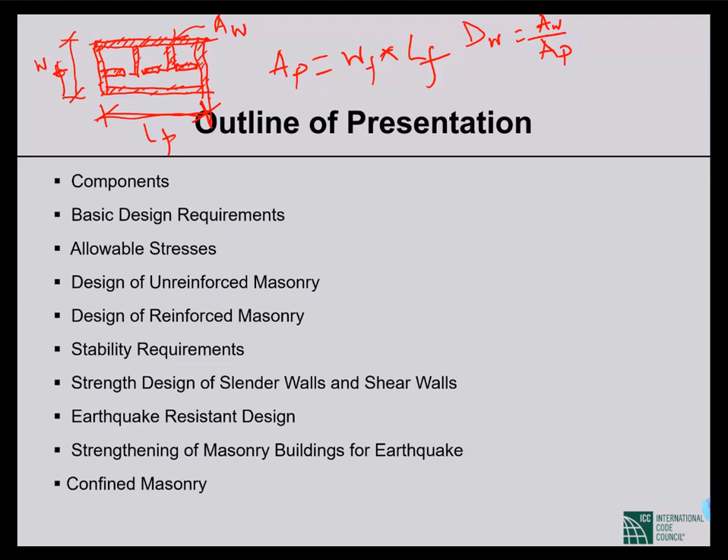For masonry walls, and for dynamic analysis, sometimes the discrete element method (DEM) is used. There are some very good publications for dynamic analysis using DEM. This is used for this type of construction, but it's too complicated, so for normal design purposes, that is not used.

For masonry walls, there is a common problem: cracks on plaster. What are the reasons for these unexpected cracks and how can we avoid them? This happens due to different coefficients of thermal expansion of the plaster mortar and the background material, which is the wall. For normal burnt clay brick walls, this is usually not a problem, but for concrete blocks, sometimes it is, since the thermal coefficient of expansion of the mortar plaster and concrete hollow blocks are different. However, manufacturers of hollow concrete blocks nowadays are taking this into account and taking measures so new blocks do not show this problem.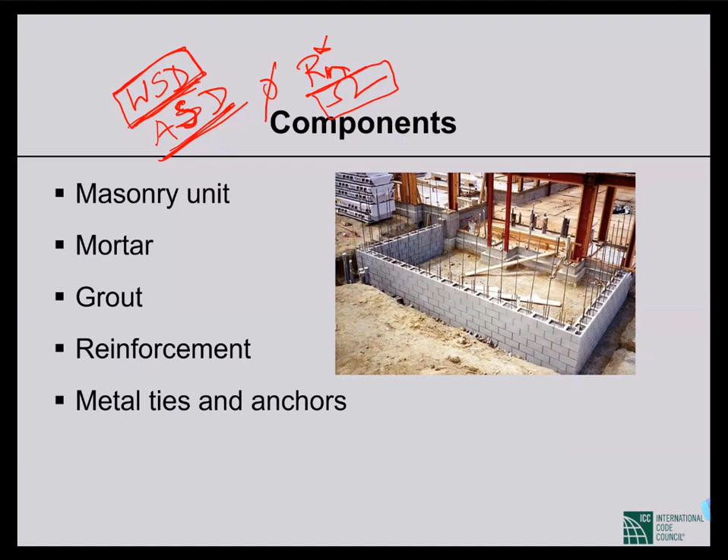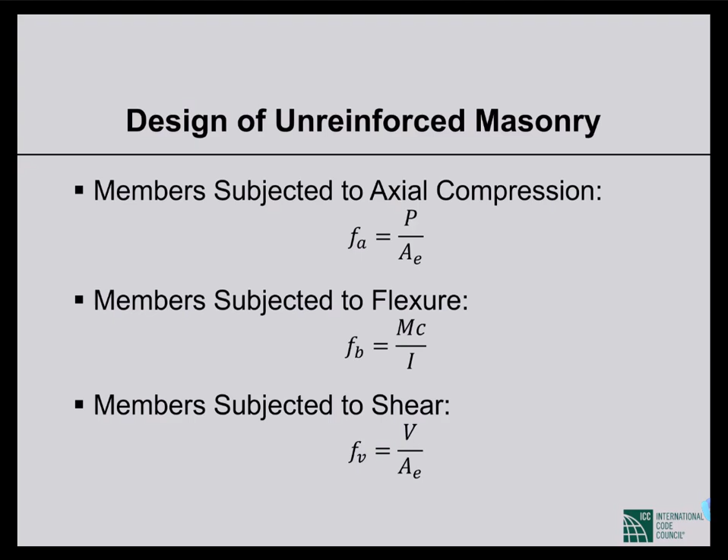So specifically that is also given there. And the number of stories, height to width ratio of a building cannot be more than 2. No table of this chapter mentions masonry buildings of more than 5 stories in height, so that can be implicitly considered a kind of limit.

For wind uplift force, how do we connect the steel roof to the unreinforced masonry wall? Yes, there is detailing on that, given in one section. I didn't include that - it shows how to anchor the roof with the wall. There is a specific detailing on that, you can find it in the code. Sorry, I didn't include that.

Which software is better for earthen structure analysis? Earthen structure is a completely different thing. BNBC 2020 does not cover earthen structures. BNBC covers bamboo structure, timber structure, masonry structure, concrete structure, steel structure, and steel concrete composite structures - only these 6 types of construction are covered by BNBC 2020. Earthen structure is out of the scope of BNBC; it will be considered as a non-engineered structure. So I don't know which software is better, actually I don't know if there is any software for earthen structures.